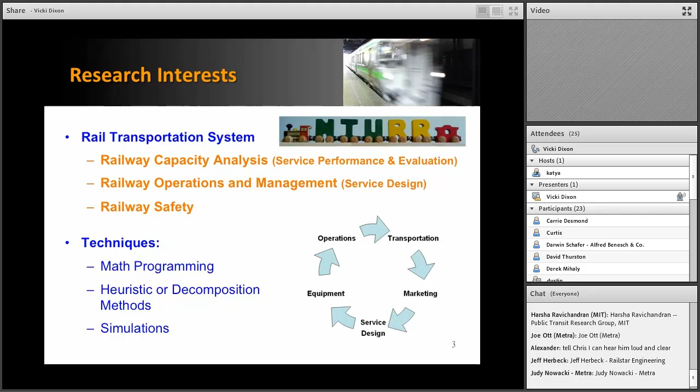Today's topic is about capacity research, so I've listed some of the studies we have been doing in railway capacity, to give you a little bit of overview or background of this kind of research. To me, I usually separate capacity research into 2 parts. The first part is capacity evaluation and computation, and this kind of analysis looks into the impact of key capacity factors, such as priority of the trains, heterogeneity of the trains. These are important factors, and we're trying to understand their impact. Based on these important factors, we can develop railway capacity models, trying to understand how to evaluate or monitor the performance of the rail line.

So that's a very important task we have been working on and still are working on this kind of topic. And the other category would be capacity management and investment.

This part is actually using capacity models. We're trying to build decision support tools using capacity models to help capacity planners determine what is the best optimal investment plan, including strategic capacity planning tools and also this high-speed route improvement optimizer.

The second one is trying to combine infrastructure options and rolling stock upgrades together to make the best decision, because sometimes you can reduce travel time by using better rolling stock, like tilting trains for conventional passenger railway. A lot of time you can use tilting trains to save time. Or you can improve the infrastructure to increase the track class and track speed. So there's some trade-off there.

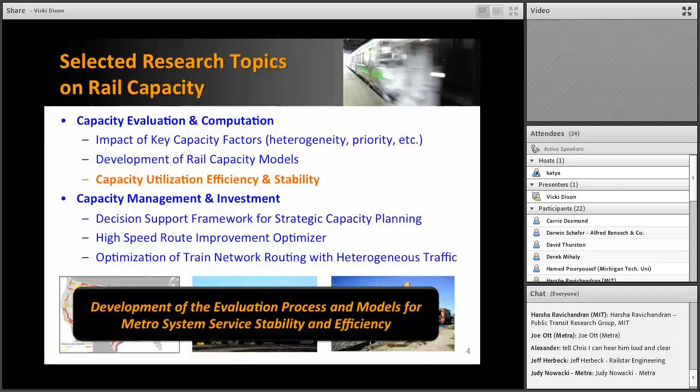So this slide is the most important slide of today. If you can understand the concept on this slide, then you're fine. I don't have much equation today, so this is the most important one, just trying to understand the topic. And to help you understand the topic, I call it the glass cup theory.

Glass cup theory. Usually I put water inside, but because it's a larger room today, I put juice inside. I may splash the juice on the ground, but I hope not.

It looked like diesel fuel. I thought that. Okay, all right.

So this is what I call glass cup theory. We're trying to understand the trade-off between efficiency and stability. For the time being, forget about the railway system. We're trying to evaluate the efficiency of the usage of this cup. Here you can see the size of this cup, and there's juice, the water level, just using water for now. There's a value for how much you're putting inside the cup. You can easily say this is maybe like 85% usage, right? It's using 85% of the total volume. That's the efficiency, and efficiency-wise, usually you're trying to maximize the efficiency.

Think about this cup on this table. If I have another cup with 100% usage, and these two cups are both sitting on this table, very stable, very nice condition - do they have any difference in stability? I'll say no, because it's a perfect condition, there's no vibration at all. It's just sitting there. So if this is the environment where you'd like to use a maximum level of your efficiency, you try to improve your efficiency, right?

So same thing for the railway system. Let's look at it this way. If we relate this to the railway system, the size of the cup is just the capacity of the system. So the capacity will be, for example, for a metro system, 10 trains per hour. For this particular metro system, you can dispatch at most 10 trains per hour. That's the capacity. That's like the size of the cup.

And then the usage, the water level, is just like used capacity. Now according to the service plan, you are dispatching 8 trains per hour. So using 80% of your system. So efficiency-wise, it's 80%. And then the empty space over here is the available capacity. We can also call it slacks. Those are the slacks built in to mitigate a possible system failure.

So it really depends on how much vibration there is. You have to think about how much vibration there is while designing your system efficiency. You don't want to use too much, and then the system will never recover. But you don't want to use too little, because that's a waste of your assets. So the whole idea is like evaluating the water stability inside a glass cup and also the efficiency of the usage of this cup.

So that's the idea. Here we can say that higher asset utilization may cause lower system stability. I say may because we're just presenting a perfect condition on the table. Higher utilization may not, right? Because in a very perfect condition, the system is 100% reliable, and then you can max out your efficiency. So it may have this kind of lower system stability.

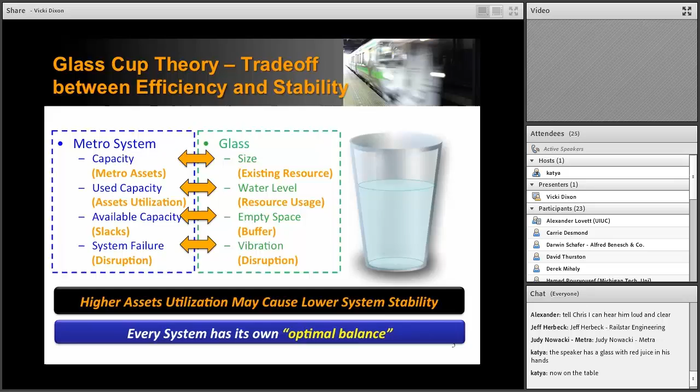Later on, I'm going to show you what this expected recovery time is. So these are the 2 most important attributes to evaluate these two. So we have to build a module to calculate these 2 specific attributes for this evaluation framework.

You want to evaluate the capacity of the system. And the second part is a metro service plan, or for passenger railway, it could be the schedule, could be the timetable. This part, we're trying to understand what is the used capacity. What is the water level inside the cup. Okay, you have this part.

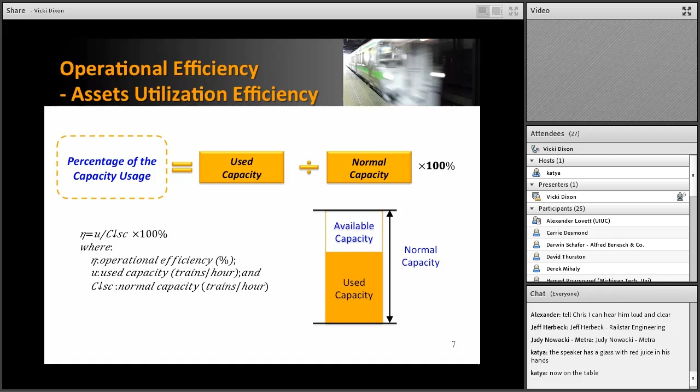Okay, and this part is new. This part is the idea, the attribute we created to understand the stability. Because we're trying to link efficiency evaluation and stability evaluation together, we need to use the same kind of methodology to evaluate that.

So for a particular section, you have a long link, and then you separate them into different pieces. Every piece you can calculate its own capacity. So for a particular section, based on the system characteristics, you can get this normal capacity. And generally, they'll be the same over time, because that's the maximum limit of your system. That's the size of the cup. So you can get this size of the cup as a normal capacity.

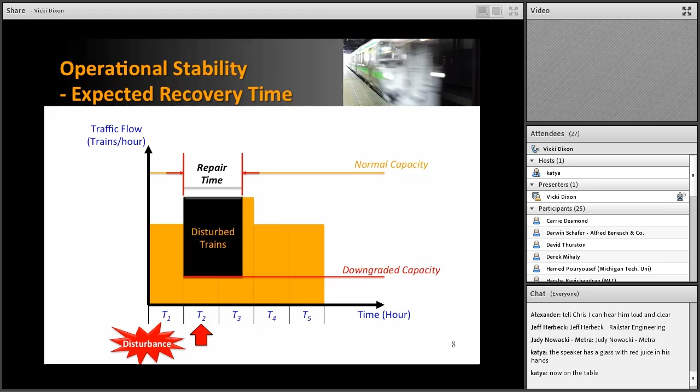And then this black area, you can calculate the area, and then you can get the number of trains to be stopped, or to be halted because of these system disruptions. So these are the trains. You should dispatch them according to your service plan, but because of this system failure, you cannot. So you hold them somewhere. And the next step, we make an assumption. After the repair time, the capacity will go back to normal capacity. We're using these rooms to dispatch all these trains. So that's the idea. We're using all these available rooms to dispatch all these trains to here.

Of course, people argue that this is not practical. In practice, you're canceling trains, you're doing a lot of operational movements. But I have to say that there's always a cost associated with all kinds of decisions. If you take into account all these possible operational alternatives, like canceling trains, you end up with some kind of subjective judgment. Are you going to cancel the train or not? What is the cost of the train?

So here we just keep it simple. We have to dispatch the train anyway. We dispatch them from here to here. We cannot dispatch from this area. We dispatch by using the available capacity. At least, if you're comparing 2 different schedules, comparing 2 different service plans, they're on the same page.

That's a standard procedure. At least you can do the comparable analysis by that. So we make an assumption over here, and then based on how much available capacity you have here, you can determine the recovery time. And this recovery time is the time for the system to be fully recovered back to the normal state. So after this period, you can see that we go back to normal operations.

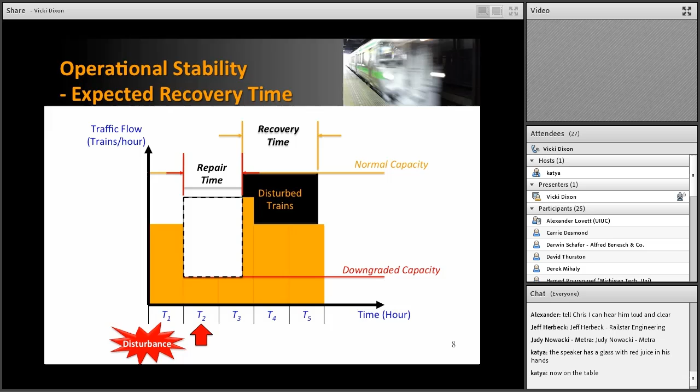That's the idea. So that's the way we evaluate the consequence of a system failure, and we call it recovery time. But there's another term right over here, expected. So it should be expected recovery time. Why? Because if we know the probability of the disturbance, probability of the system failure, times the consequence, now you have the expected recovery time. Now it becomes an attribute for system stability.

So based on the same idea, we can look at this equation. Expected recovery time, as I say, is just using the probability. You figure out the probability of a particular system failure and then times the consequence, what is the recovery time of this system failure. For people working on safety analysis, this should ring a bell. This is a risk equation, right? This is risk, and this is probability times consequence.

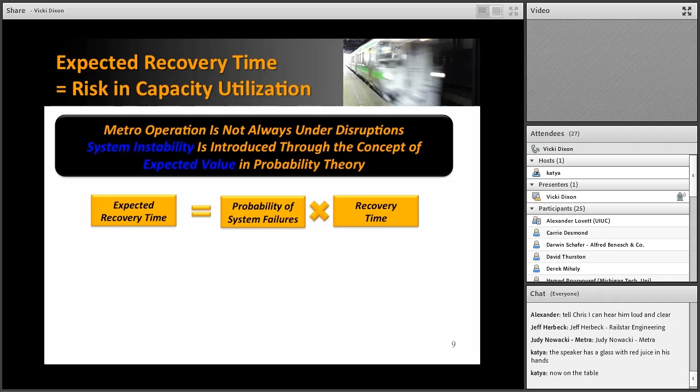So I also sometimes call it risk in capacity utilization. When you are using your capacity, there is a risk associated with it. So we call it risk in capacity utilization. That's how we're calculating the stability. And then for the probability, there are functions you have to develop. I keep it simple over here: based on historical data and using conventional reliability engineering methods, you can come up with a probability function to estimate the probability of a particular system failure.

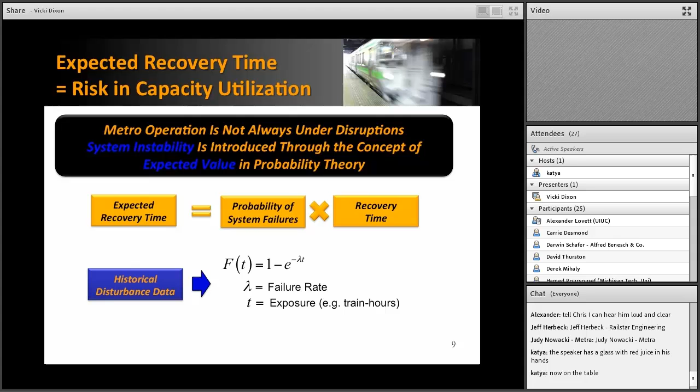So based on the data you analyze, you can come up with a failure rate. And then based on what kind of exposure you use, here we're using train hours. For example, if you're running 10 trains for an hour, that's 10 train hours. Plug in this number, and you can find out the probability of the system failure. So that's this part, just calculating the expected recovery time.

And another thing I mentioned a little bit, just to give you a little more detail, but we won't get into the equations. Another thing we mentioned before when we talked about the framework is that there's another stochastic property in repair time: how much time it takes for a failure to be repaired or resolved. Or we can say how much time it takes to bring the capacity from downgraded capacity back to normal capacity. That's another part we have to figure out.

You can also figure that out by using the historic data. To be simple, you can just use mean time to repair. You gather all the data on how much time repairs usually take, and you can just use mean time to repair. So that's an attribute you can use. And over here, we're not only using mean time to repair, we're also trying to understand the range of this distribution. So we're also using a point estimation method to estimate the range of this stability. That's as much as I want to say on this part.

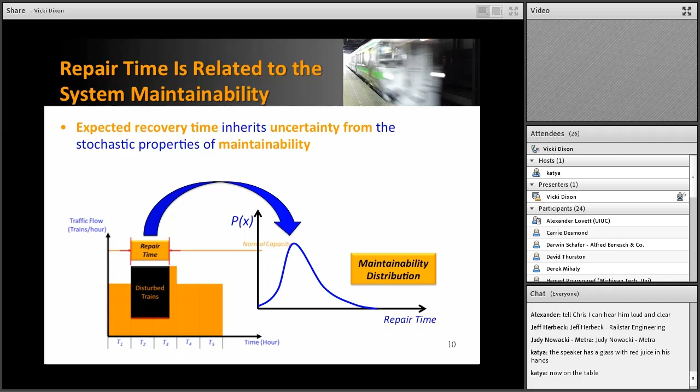All right. So that's the idea of the whole framework, and I don't want to bother you with the detailed equations. Actually, we have had this idea and the framework for a long time, but really getting into the real data, analyzing and coming up with the result, is a very painful process, I have to admit, because the disturbance data are not perfect. There is a lot of data you have to gather and analyze. That takes a lot of time. But the framework should be pretty straightforward.

So we are actually evaluating the trade-off between stability and efficiency, as I've said many times. And we're using three types of data: the metro service plan, the system characteristics, and the system reliability and maintainability.

And then over here, this is just a review of how we calculate that, how we actually get to the operational efficiency and the stability. Okay, just a review. So for operational efficiency, we need use capacity and normal capacity.

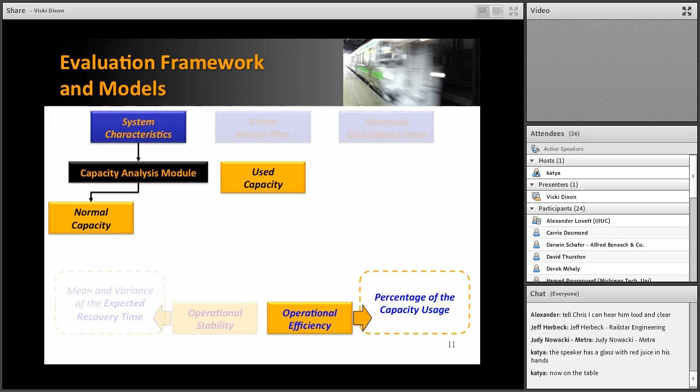So what we do is we have a capacity analysis module, which takes the system characteristics and figures out normal capacity. And then with the metro service plan, we can figure out what is the use capacity. Combining these two inputs into this module, we can get the operational efficiency. That should be simple and straightforward.

And for stability-wise, we need more data. We need the distribution of the maintainability, distribution of the reliability, the use capacity, downgraded capacity, and normal capacity. So that's why I have to build another module, a reliability module, to work on this part. Based on historical data, we can get the reliability distribution and maintainability distribution. And again, based on the capacity analysis module, we can figure out the downgraded capacity.

So from all these five inputs, we can put it into this module and finally get the stability. All right, so that's the basic framework of the whole analysis. And within each module, there will be models for that.

All right. So starting from here, I'm going to show you an example with confidential data. So I can say it's only a metro system in the world. If I limit it to Taiwan, that's too small, although it's probably from Taiwan. Anyway, we're just conducting this case study for a metro system, okay?

And we're collecting all the data from the metro system for a particular line, including the service plan, system characteristics, and historical disturbance data, as I mentioned before. We also did a similar study for the Taiwan Railway Administration, which is the operator of the conventional railway in Taiwan. We actually did that before this study.

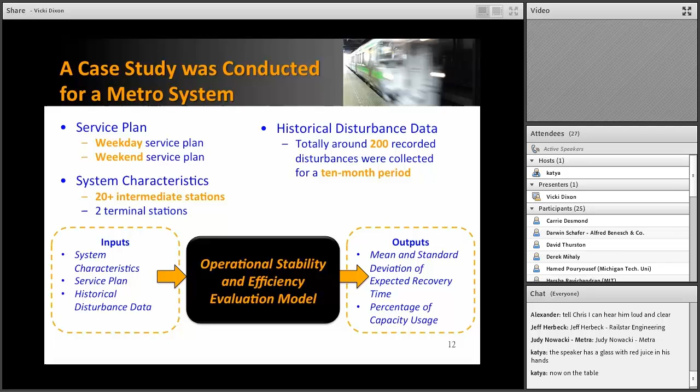So based on historical data, we analyzed the data. We did cluster analysis, separating it into different groups, and then generated the reliability function and maintainability function. For the system characteristics, I couldn't list all of them; there are just a lot. I just want to say that this system has 20+ intermediate stations and 2 terminal stations. So you have to take into account all the infrastructure in order to calculate the capacity. That's another big task, gathering the data and calculating the result.

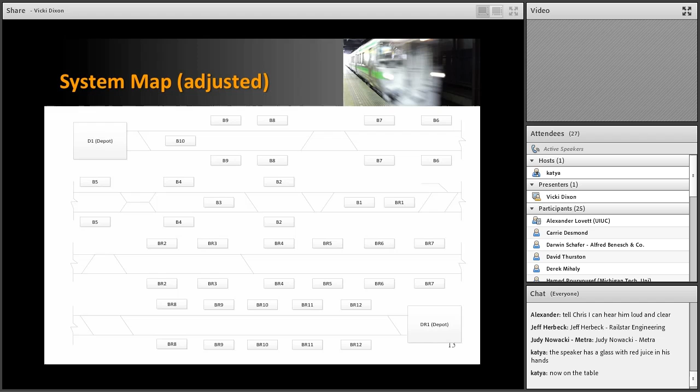But anyway, this is supposed to be a system map, so you can see all the intermediate stations, and there are some crossovers, some pocket tracks, and then 2 terminal stations. Right. So the first thing we did, which I'm presenting over here, is the determination of the maintainability.

Based on all the disturbance data, all the data on system failure, what we did first is we separate them into different groups and different types. These types are originally defined by the operator. When they're recording the system failure, they'll have the types, so we just follow them.

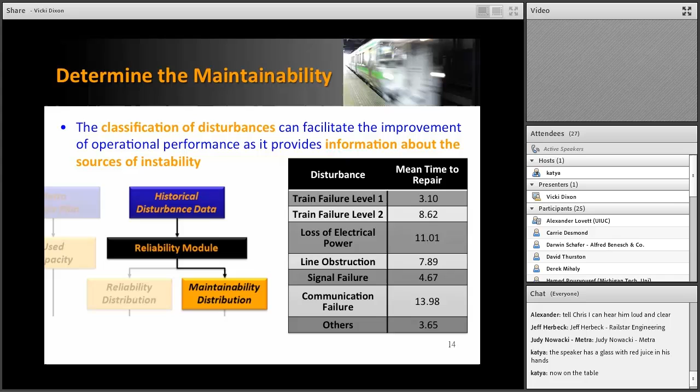But for a particular type, for example train failure, we separate them into 2 levels. We perform cluster analysis and analyze the data. We find out that there's 2 different levels inside train failure: one with very little effect, and another with much larger effect, and they come out with different mean time to repair.

So essentially, for every group, we're hoping that they're within, for example, 95% confidence interval, 95% CI within this kind of range. We want to make sure that when we apply the mean time to repair, they are within this range.

So these are all the disturbances, all the disturbances that we're looking into for the particular system. So these are the values we'll be using for maintainability, for repair time. There's also data over here, the standard deviation, that's also being used, but I didn't put it over here.

For the probability wise, we have to come up with this function. Mean time to repair, I think it's minutes over here. Sorry, I didn't have the unit over here.

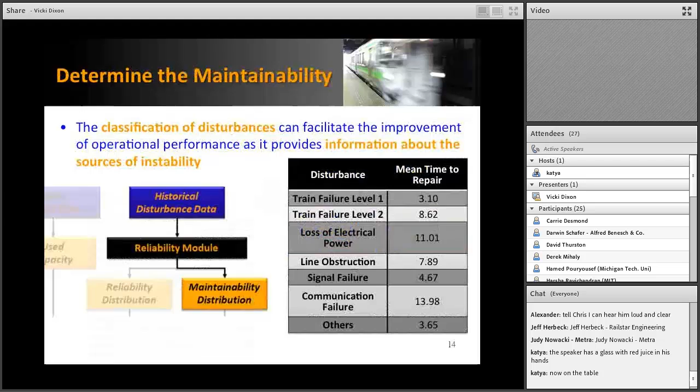Then over here is the probability of the system failure. We have to come up with this function to estimate the probability of the system failure, and these are the results. So again, we're following the same cluster analysis and then come up with a failure rate for every one of them. When you have a lambda, you simply plug in the exposure, and then you can come up with a probability of a particular system failure.

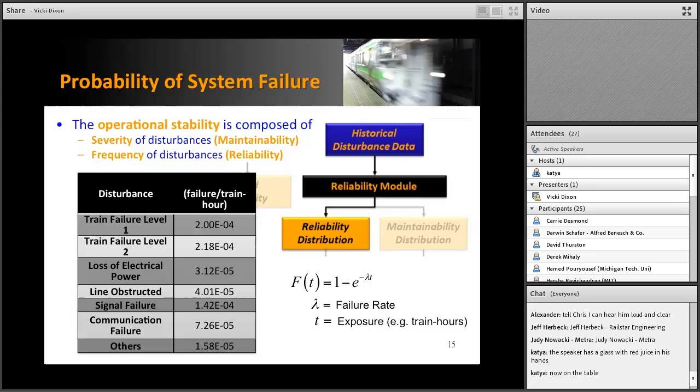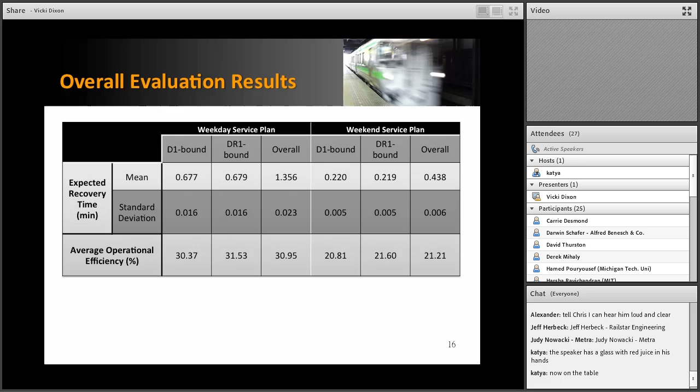Let's look at the overall evaluation results. Essentially for the analysis, we break them for the whole system into sections. There are a lot of sections, and then we break them into every hour. I'll show you later on over here, maybe just jump to later. Yeah, so that's the detailed analysis.

But this table is an overall evaluation result. What you can see over here is for the row, this row is representing the operational efficiency. This part is a weekday service plan, and this part is a weekend service plan. There are two directions of running, so we can calculate for one direction, like westbound, will be this, and eastbound direction will be this. All right, let's just look at the overall results.

If the overall result wise, in terms of operational efficiency, the weekday service plan, of course, is using the asset more than the weekend service plan. So increased from 21% to like 30%, 31%, so increased by 46%. And then if you look at the stability, it's actually from 0.438 to 1.356, so this range is about plus about 200%.

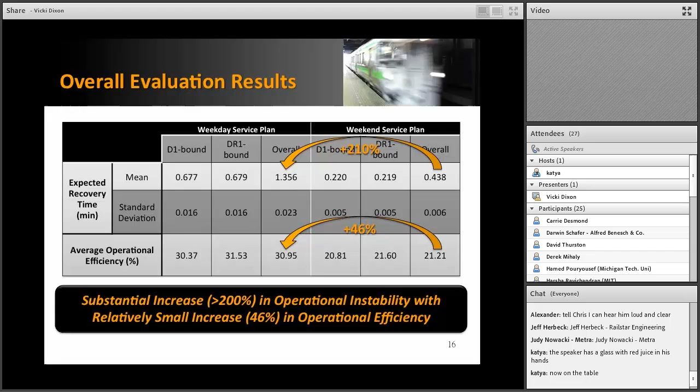So what I want to show you over here is that they are actually moving in the same direction. When you're increasing the capacity utilization level, you are increasing the instability, but they're not increasing at the same rate, they're increasing at a different rate. So that's why you need a method to establish this relationship, understanding what is the relationship between efficiency and stability. All right, so this is just the overall results.

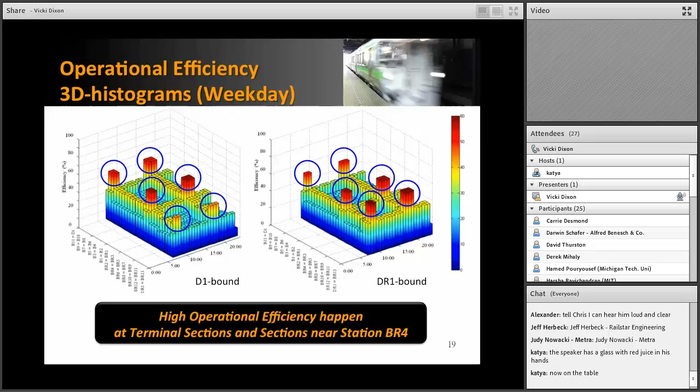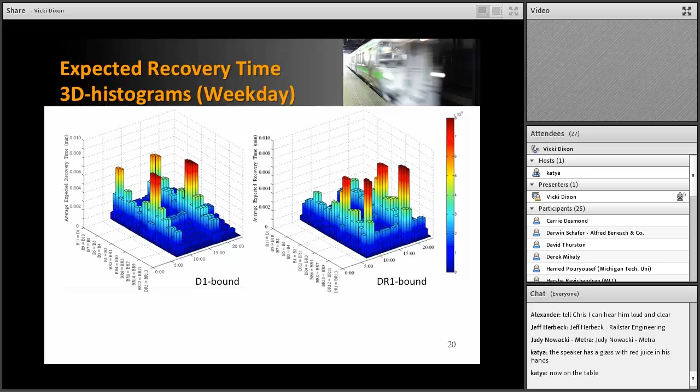And then this is another perspective in time. Now the x-axis is the time, we're not talking about location-wise, we're averaging out the effect of location. And clearly you can see there's a morning peak and an afternoon peak. So that's again just another way to look at the problem, another way to look at your system efficiency and stability. You can see there's a very close relationship between efficiency and stability.

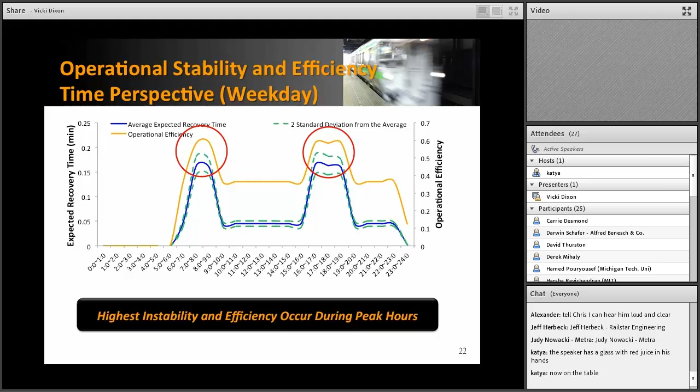All right, so the last thing I want to show you. Oh, please, we'll just wait.

The last thing I want to show you is another way to use this kind of analysis. What I presented before is pinpointing the problem, figuring out where the problems are. Now, if you find out the problem, or you found the instability, and the stability is not acceptable, what can you do? So here, this just shows you some of the methods you can use.

One, you can adjust your service plan. Of course, adjusting your service plan means running less trains, reducing operational efficiency, but you can increase stability. Second, you can improve capacity. That's similar - in terms of reducing usage and efficiency level, because you increase normal capacity while keeping the same service plan, since you have to run those trains to meet demand. You increase capacity that way.

Another way to improve your system would be to improve system stability and maintainability. For some systems, like the one I showed you before, there's a lot of system failure from the communication system. So what they did is upgrade their communication system. But before making that decision, this tool can help you evaluate what if you upgrade your system, what if you upgrade your system reliability - what's the impact? That's something we can show you and help you with.

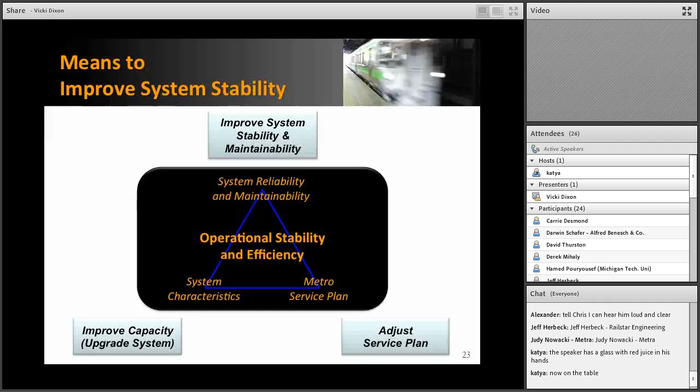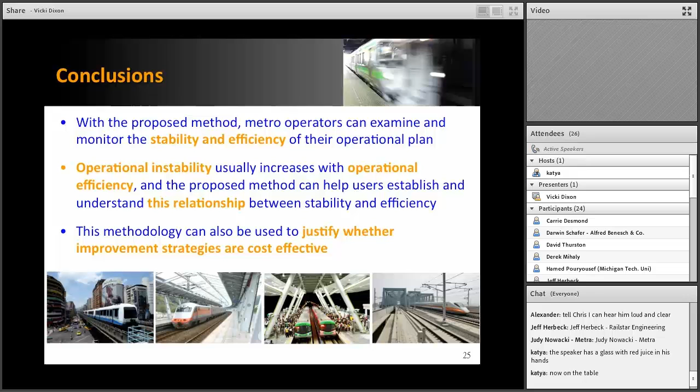So in conclusion, with the proposed method, the metro operator can examine and monitor the stability and efficiency of their proposed operational plan. We found that operational instability usually increases with operational efficiency. The proposed method can help users establish and understand this relationship, and also help justify whether an improvement strategy will be cost effective or not. That's the conclusion of this study.

For future work, we're proposing that every metro operator or railway operator should closely examine disturbance data - they should keep a database on all system disruptions, because the system will change over time. So what we're proposing is that you set up a time frame - for example, always looking back 3 years at historic data, and keep moving: for this year, look at the previous 3 years, for next year, the previous 3 years, moving in this direction, updating your system status since it's changing over time. This status will tell you the amount of variation - you have to capture and monitor this variation in order to set the right service plan.

Okay, so you want to know the most up-to-date system reliability status. And the second one is we're still working on this. We're still focusing on the determination of the optimum balance. What we have been presenting is 2 attributes: efficiency and stability. But because the attribute we use for stability, which is expected recovery time, is a new attribute, railway operators just couldn't say what the acceptable level is. We have to do more analysis to understand the impact of this expected recovery time.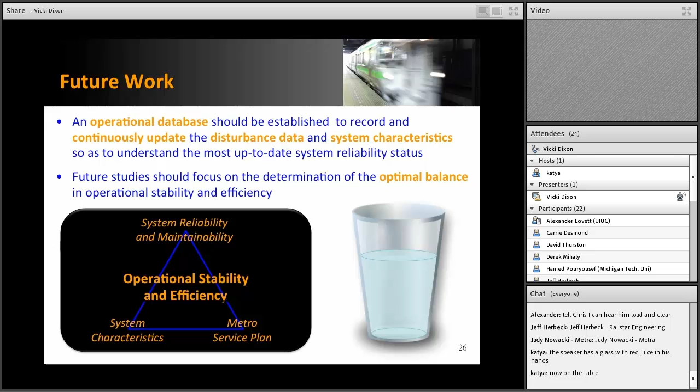I see. So for this station, they have a long dwell time, so they're actually using up the capacity. It's essentially the same service plan with the same headway, but you end up with different efficiency. Okay, so it's dwell time at the station that's the primary driver of that. Exactly. Okay. That was on the efficiency side. My other comment was on the stability side.

It seems like you hit on something really important, which I've never really thought about, which is that in most of the capacity studies we see done for freight rail, the metric they use for the cost function is typically the sum of the excess costs incurred over the entire event until they get back to normal, right? So extra fuel, extra rolling stock utilization, that type of stuff.

But it strikes me as in the passenger model, I think the idea of using expected recovery time is great, because the contract with the customer is fundamentally different. Right? Freight, you don't really care how long it takes to recover within reason. The coal can sit there for a day on the side, and as long as you get two coal trains there tomorrow instead of one today and one tomorrow, the customer doesn't really care, the coal doesn't really care. Actually, I take huge exception to what you're saying, but the premise is okay.

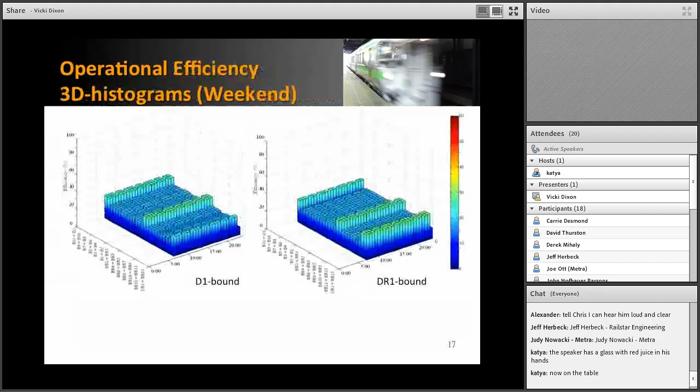Okay. So I think what Conrad is saying is that we should be counting the recovery time from here to here, because that's really when the system recovered, from the beginning to the end. For the conventional railway system, that's what we did. For the metro system, I have the student working on this arguing with me. He's saying that you're double counting because the impact from here, the length in this direction, will actually affect the impact over here. So he said that's double counting. If you count it over here and you count it here again, that's twice.

So I accept his argument. So that's why in this analysis, we keep it this way. We're separating the recovery time from the repair time. So they're not part of recovery time. But I think that's something we can go a little bit more into detail, a little bit deeper, to try to understand what is the attribute and what is the right value to use.

But I like the expected recovery time better than delays because in my experience, we would be measured against: if the piece of infrastructure failed, how many delays would this have? Right. But that's highly dependent on where you are in the network and at what time it's a failure. Right. And this can go even deeper.

It's very interesting. The delay is also related to how much available capacity you have. If you have a very low capacity usage, then it's fine. Even if you have a system failure over here, you have a lot of space over here. What we found for the conventional passenger rail is they have the highest instability, even in peak hour, because it's always like 90%, 90%, 90% for 4 hours. And then you just don't have room to mitigate any system disruption.

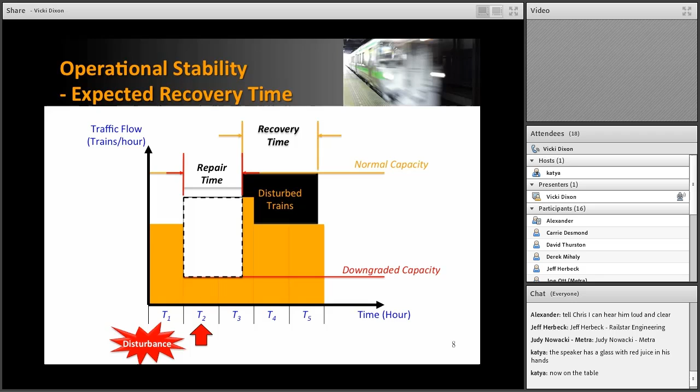So, if you're 100 miles south of this place and you're 5 minutes late, you want to get back on time by the time you get there, and that becomes a much more urgent problem if you're only 20 miles away; actually, then it's too late. But the point is, there's this combination of location and temporal impacts of train delays on the stability of your system. Yes, and we can develop that. Let me just jump out.

For the curve I'm just developing, I'm showing you over here. Oh, I have to present it. Excuse me. We can have this for every section. So for every subdivision or every piece of railroad, you can have this curve, and then you can understand the impact from the efficiency and the stability, and they'll be different. Here I'm just showing you the consolidated result for the total system, but of course, it's the same idea.

You don't have to add them up. Essentially we're actually doing it specifically for every section and every time frame. And then here you can plug in this effect, and then you can try to understand where are the places you need more slack, and where are the places you need less slack. Yeah, that's a good point.

The point is there's a disutility function associated with delays that varies depending upon where you are, and the impact of that delay may manifest itself very far away from where you are at the present time. So you have another sort of tool: the more distance and time you have between where you are now with your delay and where it's going to matter is another approach to how you manage the recovery. Yeah, thank you. Please. Yes.

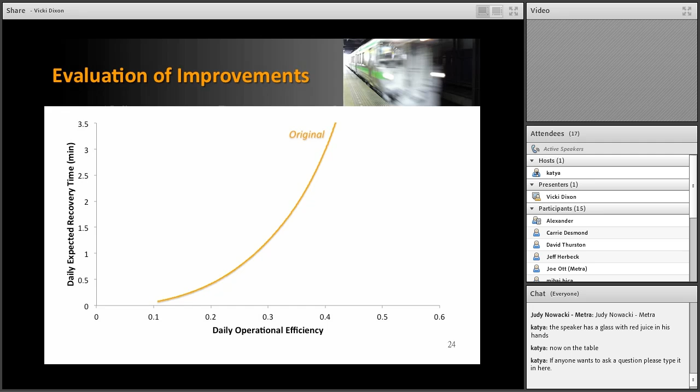Can we go back to slide 21 again? Okay. I'm sorry, I thought it was 21 before this. So I didn't understand in this one why the operational efficiency curve outside the peak areas is kind of just flat, whereas your expected recovery time fluctuates. It seems to me they should be correlated. Yeah, they should be correlated, but this metro system is kind of special.

They have different downgraded capacity for each section. The reason is that a metro system usually doesn't have a crossover at every station. So whenever something happens, a station near the crossover will have higher capacity compared to a station away from the crossover. So the downgraded capacities are different, and that's why you can see this kind of variation, even though they're in the same service level. So that actually gets into the capacity analysis. You have to understand where the siding is, where the crossover is, and what the downgraded capacity is.